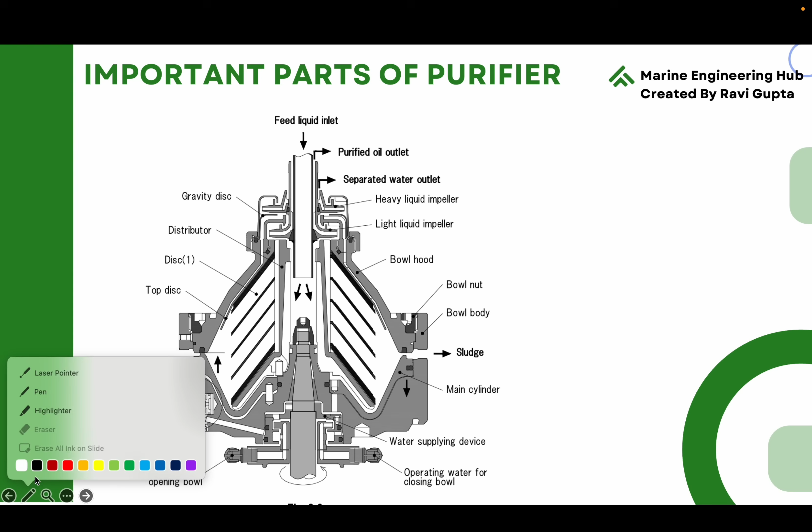So let's start today's video on purifier overhauling. As you know, in part 1 we talked about the removal of the heavy liquid chamber, light liquid chamber, gravity disc and the inlet pipe. After removal of that, we have kept the bowl along with the bowl assembly onto the stand and locked it.

Now we're going to perform the overhauling. Before performing the overhauling, let us get accustomed with the parts of the purifier. This is the top part of the purifier which I explained in the last video.

Now let's see the bowl hood part. This is a lock nut, this is the bowl hood, o-ring, main cylinder and top disc, upper disc, disc stack and distributor. If you see here, this is the bowl hood part. After that, this is the top disc, this is the disc stack, this is the distributor, and this is the lock nut. So these are the main components.

Now let's see, this is the main sealing ring, this is the main cylinder, and this is the bowl body, and on the main cylinder there is a pilot valve. So let's see one by one how we're going to perform this.

First thing we will do is use a compression tool. So after putting the purifier bowl body onto the stand, first we put a compression tool. This is a compression tool. The lower part of the compression tool basically sits onto the distributor.

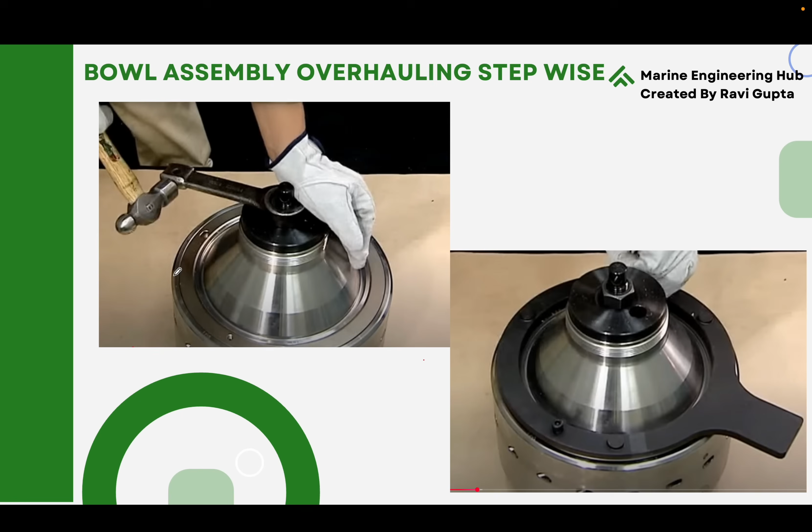So we are compressing the distributor so that there is a distance between the bowl hood and the disc stack. After doing that, the lock nut removal happens. When there is a distance — meaning when we are pushing and compressing through this peep hole — we will find a distance, and the bowl hood will be detached from the inside of the disc stack and distributor.

So when we are placing this tool and hammering here, it will come up very easily — the lock nut will come out very easily. Now before you remove the lock nut, one important thing you have to do is use a whiteboard marker, paint marker, or permanent marker, and put a straight line like this.

In the old purifier, normally in a new purifier too, if you zoom this area you can find one marking here, one marking here, and one marking on the lock nut. So there are three dots, and you have to make sure all three dots are in one position.

If this zero engraved marking is not reflected clearly, you can put a permanent paint marking so that when you are boxing back, you make sure that this marking remains there.

Now you take out the lock nut, and after that remove the compression tool. After removing the compression tool, put the jacking tool and put the bowl hood lifting tool. Then lock it and jack it by rotating in this way. Meaning we put the tool, lock it with the heavy liquid impeller lock nut, and then lift it up.

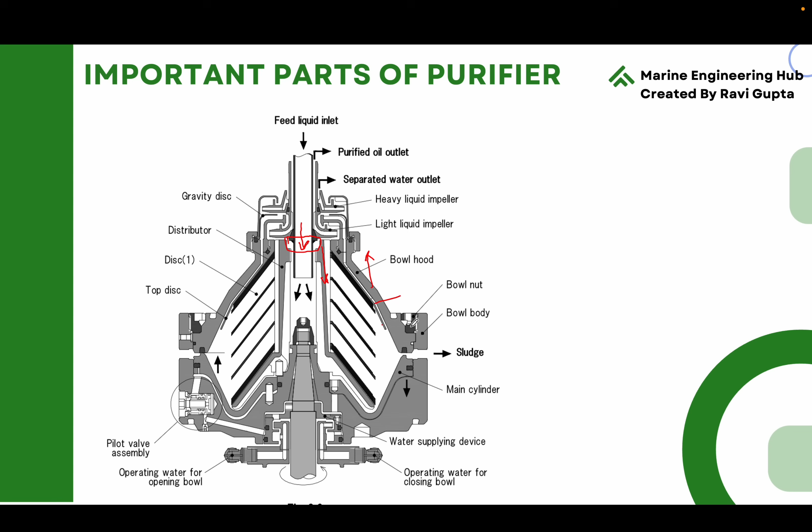Now one thing you should see is this part, the groove arrangement. If you look here, you can find this thing - this is the groove we are talking about. Basically it will sit in this groove, so you have to make sure it properly sits in this groove. After that you take it out.

Now you take out the distributor along with the disc stack, and now we come to the main cylinder removal. There's a very important thing about these holes - there are 4 holes provided in the main cylinder. These 4 holes may get dirty because of sludge accumulation. You have to make sure you clean these holes thoroughly with air, WD-40, diesel, whatever method you want to use - clean it properly, make sure all the threads are visible.

Then you put this jacking tool, and after that you put the lifting tool. Now when you are tightening these 4 nuts onto the body, make sure all nuts are in the same alignment and same tune. It should not be tilted on one side and raised up on the other side - it should be on the same plane and aligned.

After that only you start to rotate this thing. You first rotate it forward, then reverse the movement - a to and fro movement, forward and backward, you have to do. Like this you do first time, then back up, again do like this, again back up. In this way you do it until you take out the bowl main cylinder.

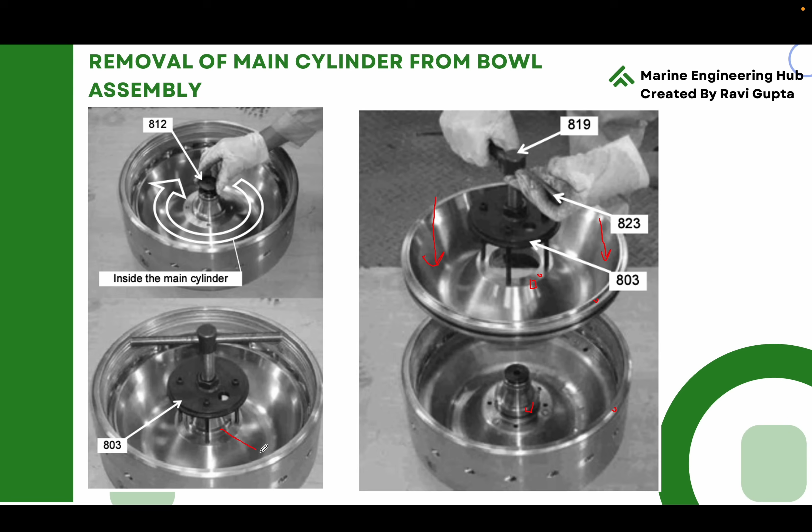So when you are placing it, suppose you place it down in this way, you have to align this lock nut along with the groove here. Along with that, you have to make sure all three zeros are in proper aligned condition. Only when this happens will it go like this, and it will sit properly.